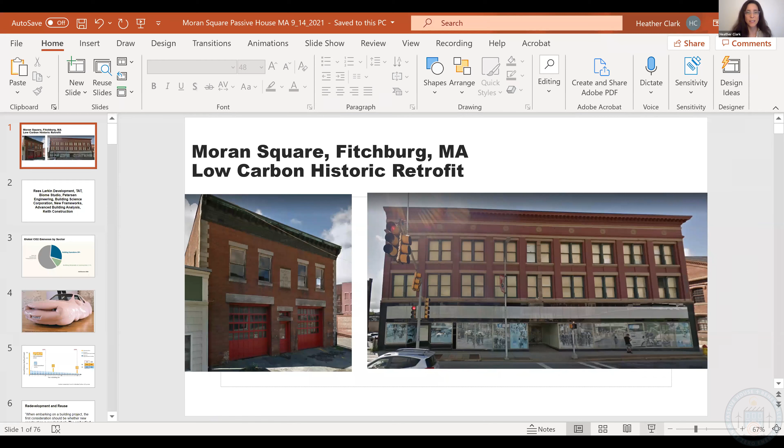I now am at Rocky Mountain Institute as of May, but prior to that, I did a lot of work in affordable housing in Massachusetts on the development side. I created WinnCompanies' Green Building Program in the mid-2000s, and I also led Castle Square Deep Energy Retrofit. Then about 10 years ago, I formed my own company, Biome Studio, where I've been working on lots of different projects, including this one, which is Moran Square in Fitchburg. This is currently under construction, and I started at RMI at the end of May, and this started construction right after I left, so the timing was good. What I hear, things are going well at the site. It's always a little nerve-wracking to leave a project, but things go on. So now, by the way, I work at RMI. I manage Realize, which is our deep energy retrofit accelerator, and I also work on federal and local policy as well.

Okay, so Moran Square in Fitchburg. It's a beautiful historic property right downtown Fitchburg. It includes a firehouse on the left, a vacant lot, and then a commercial building that's 3 stories. On this project, we're going after not just an affordable property, but we're also going after federal historic tax credits, which makes it much more challenging to achieve these goals.

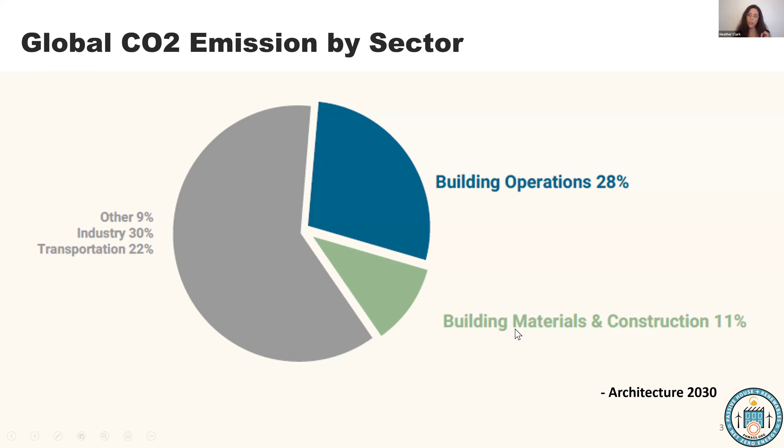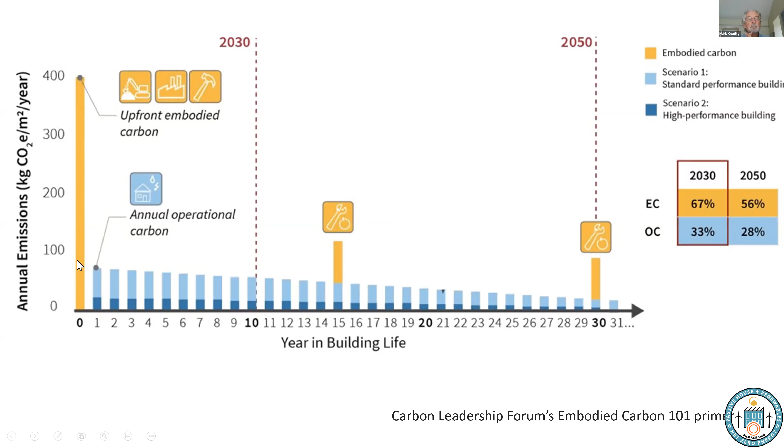The exciting thing, though, is that when we embark on a building project, the first thing we should do is consider whether or not new construction is even needed. The exciting thing is that the embodied carbon impact of redeveloping an existing structure is 50 to 75% lower than the impact of constructing new. If we are able to retrofit our buildings, we are so much further along on addressing climate change. I think this is an area we really need to be focusing a lot of energy and effort on: how do you redevelop?

There's also all these social benefits to redeveloping existing buildings in terms of connection with neighborhoods and feeling like a cohesive place. So there's lots of benefits. I need to mention RMI recently did this really great report analyzing low embodied carbon materials, and I can share that with all of you after this presentation because it's a really helpful resource.

So how do we approach this goal at Moran Square, which I'm calling decarbonizing Moran Square? Well, the first thing is we leverage the embodied carbon of these existing buildings. We're also reducing operational carbon through PHIUS passive house. And then we are also using low carbon and carbon storing materials for the structures that we're building.

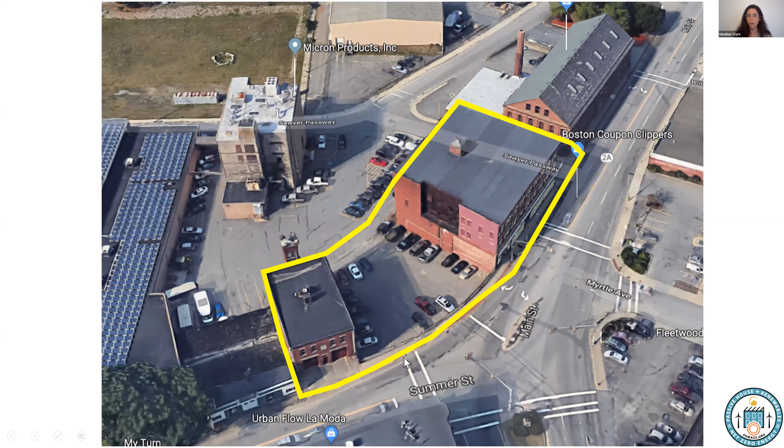So here's the site, right downtown Fitchburg, Massachusetts, and we have this existing firehouse. We have an existing 3-story commercial building, and we have a vacant lot. We're right by the train station. It's a walkable neighborhood, and it's an area that really needs investment as a gateway city. The firehouse is beautiful, historic. We have a vacant lot where we're going to be building new construction, 5 stories.

And then we have this commercial building. What we're doing here is we're going for federal historic tax credits, so these projects are regulated by the National Park Service. We believe that we are probably the first passive house project in the US to get federal historic tax credits. There could be others - I know others have attempted and made really good efforts and haven't got there. But this could be groundbreaking for passive house if we can achieve this. This is the new building that will be in the middle.

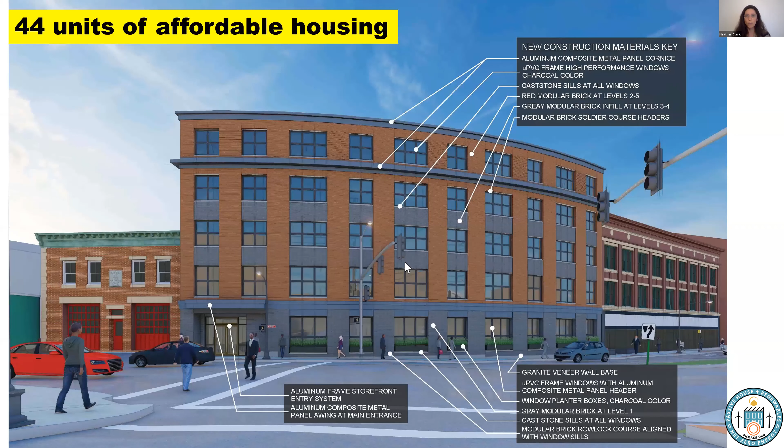So let's talk a little bit about carbon storing materials and what that looks like. Embodied carbon is the sum impact of all the greenhouse gas emissions attributed to materials throughout their life cycle.

We can reduce - this is that study I mentioned about reducing embodied carbon in buildings, I'm going to refer to it a few times. It just came out through RMI where I work recently, and I found it incredibly optimistic in terms of what it's showing of how impactful we can be with embodied carbon. So this is the conclusion of that report. They looked at all of these case study projects, and what they discovered is that on mid-sized buildings, you can reduce embodied carbon by 46% for less than a 1% cost premium. That blows my mind. If we could really do some simple changes in how we're building our buildings, we could be achieving these really deep carbon savings for very little cost.

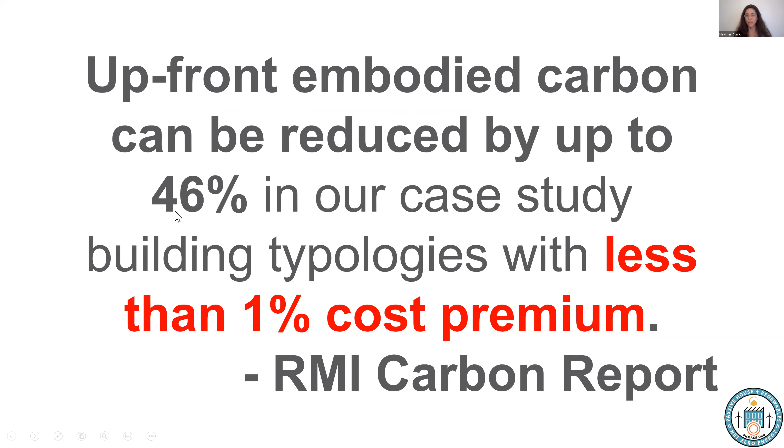So what does that look like? What types of improvements can you make on embodied carbon that's not that hard to do and not that expensive? The first is optimizing your concrete mix. And from that - this, by the way, I am sharing some general data from the RMI report, this is not analysis that we did for Moran Square, because we actually didn't have funding to do a really deep dive at Moran Square into the results of the embodied carbon work that we're doing. We just created goals that we're specifying to, but we didn't do any kind of overall analysis. But what that RMI study is showing is optimizing the concrete mix makes a huge deal. Using high recycled content like rebar also makes dramatic reductions in carbon, at very little cost.

Selecting low or no embodied carbon insulation products has a 16% reduction in carbon at a building. Glazing with low embodied carbon materials gives a 3% reduction, but it does have a cost premium. And then finish materials give a 5% reduction with little to no cost premium.

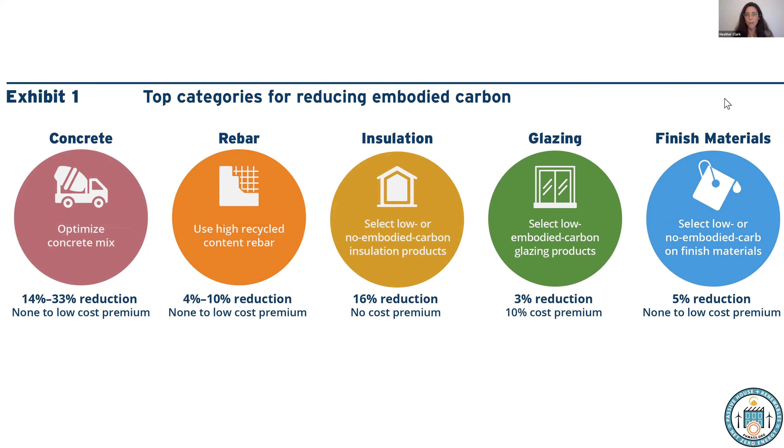So how do you go about this using materials that are currently available? In terms of embodied carbon, different materials have larger greenhouse gas emissions. Depending on what the materials are, like cement or steel, you're creating quite a large amount of carbon emissions. What's really exciting though is when you get into this negative area - these materials can actually potentially be storing carbon, like straw, mass timber, or other materials.

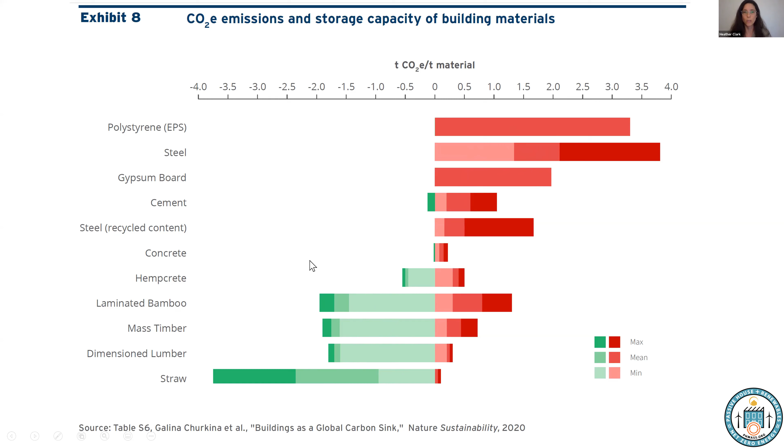Similarly, on insulation at Moran Square, we actually outlawed XPS - we said we're not using it. Even under the foundation, we're using a product called Glavel, which is a recycled glass product that acts almost like gravel but is also insulating. We said we're not doing XPS anywhere, and instead we're focusing on insulation like cellulose, which can actually be carbon storing.

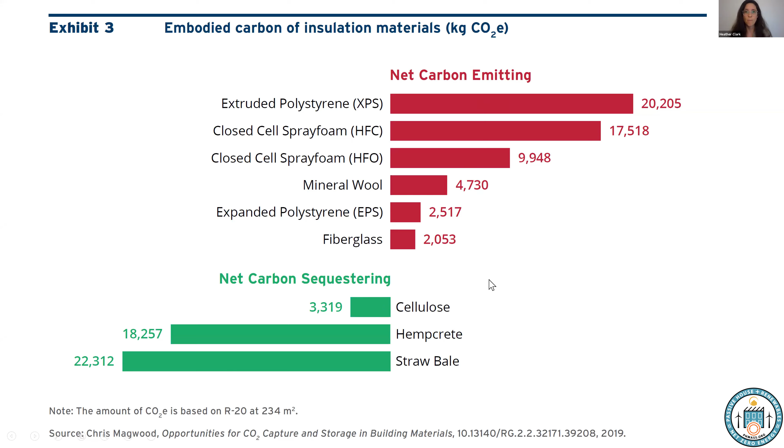If you're thinking about what materials are low carbon or carbon storing, I really like this carbon storing materials palette. Think about natural materials. When I first became interested in green building in college, in the late 90s, I was really interested in the whole natural building movement. I did a lot of straw bale workshops and worked with my hands. Those natural building materials we used back then are actually what we need now, even for these large buildings. So let's think differently about materials.

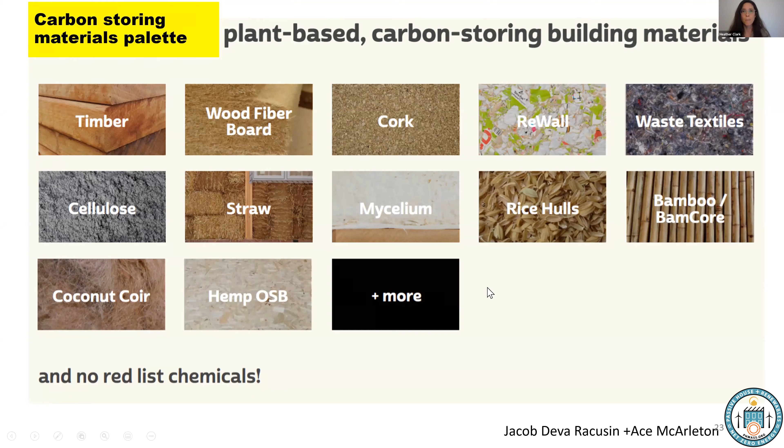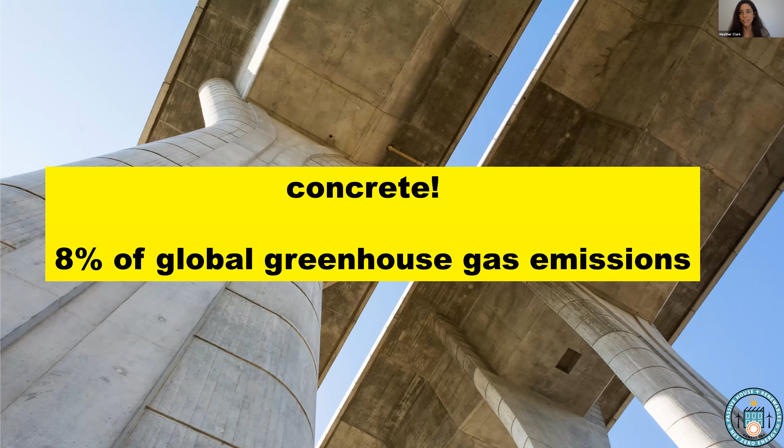You can look at environmental product declarations of materials, and there are other methods to get a better analysis. And then, of course, concrete: 8% of our global greenhouse gas emissions are caused by concrete. So the first thing we're trying to do at Moran Square is utilize materials thoughtfully. The next part of our strategy is concrete—we try to increase our fly ash content and reduce Portland cement.

On the insulation side, we use cellulose mainly, some mineral wool, some eco-fiberglass, and Glavel—that recycled glass component. We did have to use some foam in a parking garage ceiling, but we specified a low HFO foam. For the studs, we specified wood instead of steel, which actually makes a considerable difference in carbon.

However, as many of you have probably experienced with COVID, the price of wood has gone through the roof. So last I knew, as I was leaving, there was a big debate about whether we should switch to steel studs. And it looks like they did go to steel studs, which is kind of a bummer. Hopefully on future projects the price of wood will get more in control and we can use wood instead of steel.

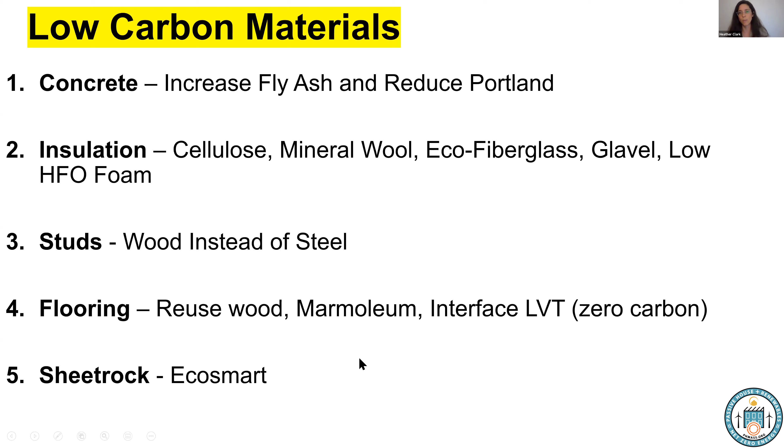On flooring, our goal is to reuse as much wood flooring as possible. We also use marmoleum—Interface LVT offers a zero carbon LVT. And for sheetrock, we use an EcoSmart sheetrock, which has high recycled content.

Okay, so that's embodied carbon—we need to be doing it. Let's talk about how we got to passive house in this historic building, which is really hard to do. And then I'm going to talk a little bit about solar.

So I said it's really hard to do, but I guess it's not always that hard. I think being one of the first is the hard part. It's going to be easier for all of you if you try to do this in a historic building. So a few principles of passive house, which I'm sure you're all familiar with, but I'll say it in case there are newbies on the call.

The first principle is that we need continuous insulation without thermal bridges, which is harder to do in an existing building. So we'll talk about how we did that. We were allowed by PHIUS some thermal bridging—we didn't go in and cut where the floor connects to the wall, but we really minimized thermal bridging.

Airtightness—these buildings have to be airtight. High performance windows and doors. This is a huge issue when doing a historic retrofit project, because the National Park Service, who regulates these federal historic projects, is very restrictive on what kind of windows you can use. So I'm going to talk about that—that's our breakthrough. We need heat and moisture recovery ventilation, and the result is minimal space conditioning.

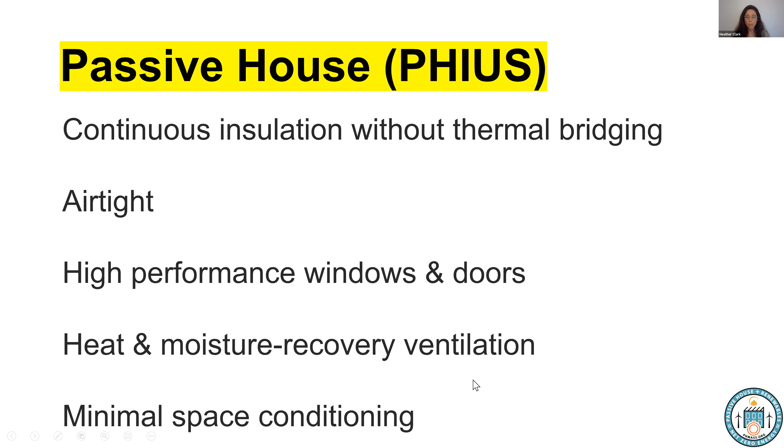So in terms of our air barrier, where do you draw your line on the plans? For our project, there was a lot of early discussion with PHIUS about whether we should separate out the historic buildings or include the new building. How do we do this?

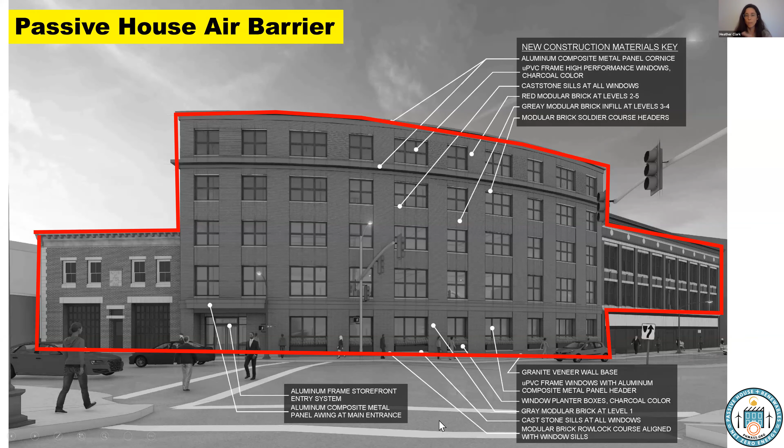At one point, when it looked like we might not be able to use the windows we wanted, we even considered not doing the historic buildings as passive house. In the end, we created an air barrier that combines all three buildings, because they act as one big system—a central system for heating and cooling that supplies all of these units.

So in terms of whether you should embark on the challenge of a historic tax credit project and try to achieve passive house, let's look at three things that can help you make that decision. The first is simple architecture—I would not attempt passive house on a really complicated structure. What we're dealing with here are more like boxes, and that makes it a lot easier to achieve passive house. They're a box.

The second is the windows. These windows here are 1/1, and they're very simple. If it was a really complicated window, I think you'd have a harder time replicating it as a window that's going to work for Passive House.

The other is that we had limited interior exposed brick. The National Park Service often asks that you keep exposed brick if it's there. Fortunately, in this case, we didn't have a lot of exposed brick, so we were able to do a really good job insulating the interior walls.

Okay, so some of the guidelines that made it more challenging to achieve Passive House. The first is windows. As you know, Passive House projects need casement windows to meet air infiltration. These weren't casement windows, so what do you do? I'll talk about that.

Wall section depth - we were limited by the National Park Service on how deep our wall sections could be. We wanted to go deeper, but they really limited how deep those could be. In some locations, we were required to have exposed brick. Other places, we couldn't get rid of thermal bridges. PHIUS worked with us, and we did a lot of analysis to make sure we didn't have any condensation issues or other long-term problems. But they turned out to be not that big a deal.

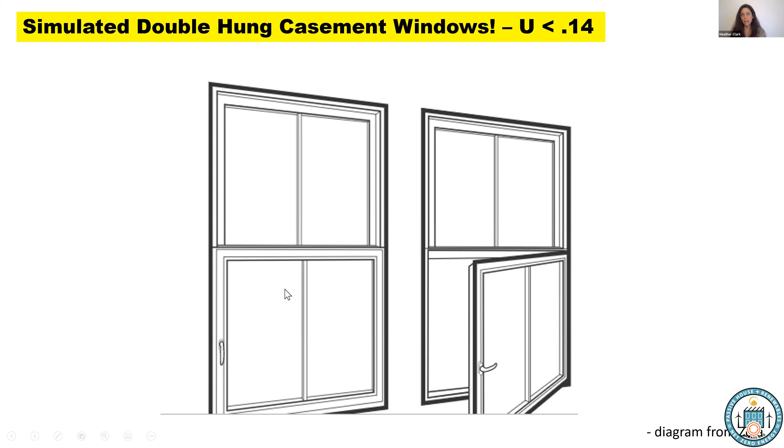I basically spent a summer talking to every window manufacturer out there. What people are doing now is creating these simulated double hung casement windows. In this case, this diagram is from Zola - we didn't end up using a Zola window, but this is how the windows work. They look on the outside like a typical double hung, but on the inside they're a tilt and turn casement window. Huge benefit - we're doing triple pane on this project, and it's a huge benefit for air infiltration to do this.

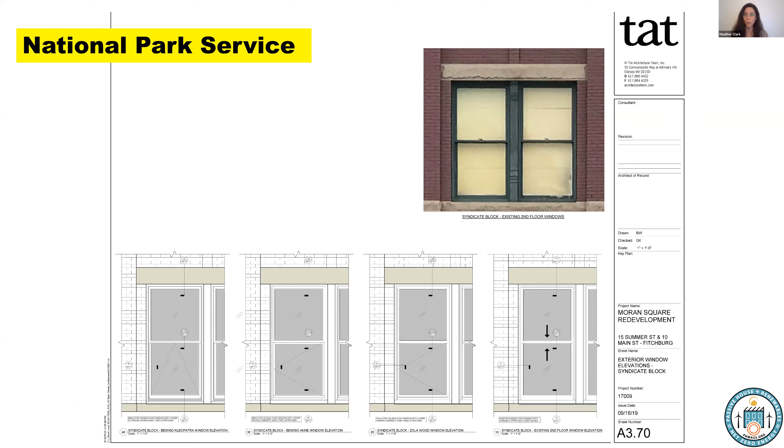Now, to our knowledge, the National Park Service has never approved a simulated double hung casement window. So we spent about a year working with them on this, where we had them look at a series of manufacturers. They did a really comprehensive analysis of all the details, how deep our meeting rails were, and all sorts of other things. Then they gave us guidance, very informally, on which windows they thought might work and might not work. We ended up going with a Yaro window.

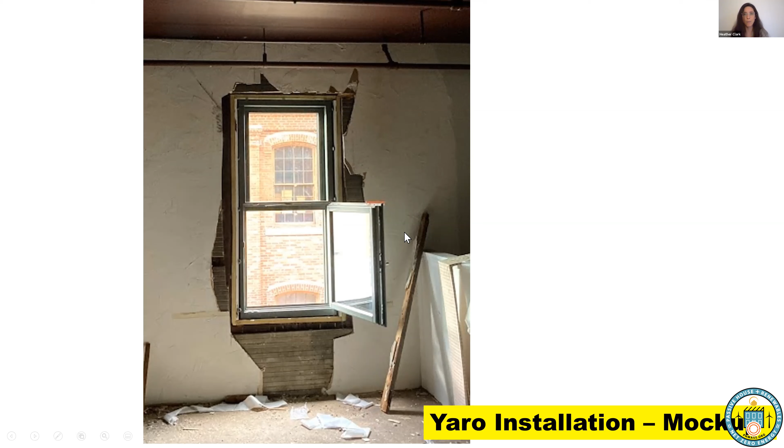Yaro worked with us - this is a demo where we were experimenting. Even when we installed those Yaro windows as a mock-up, we realized they didn't look good enough. There was too much reflection, they weren't really tight enough, and they didn't look enough like the existing windows - they had more of a shadow. So we had to do even more back and forth with them.

I'm saying all this not to scare you, because I'm sure it sounds a little intimidating to spend a year just working on the windows. However, the exciting thing is that the National Park Service is really looking at Moran Square as a national model. If this project looks good, approving and getting approved simulated double hung windows is going to be so much easier for future projects.

National Park Service told us that they also have climate change goals, and so they're looking for answers. So I'm really excited about that. So I hope our path is going to make it easier for all of you folks to do these projects on historic buildings.

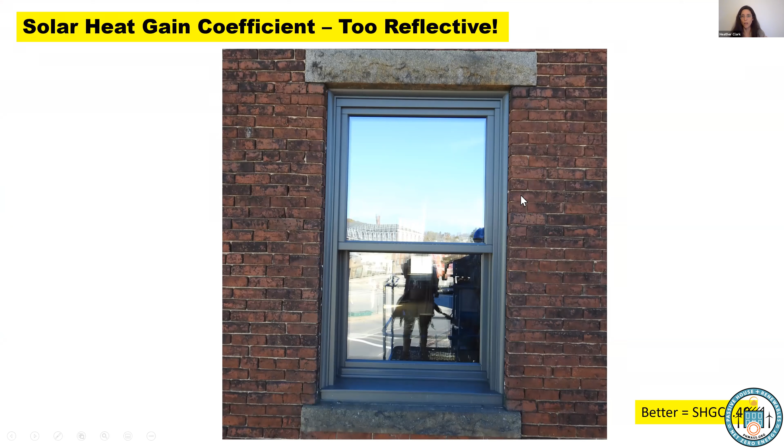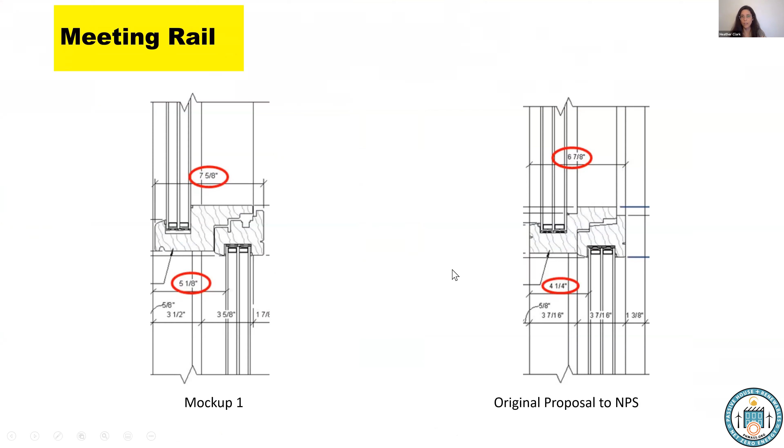So this, again, our solar heat gain coefficient was too reflective. We ended up making it less reflective, which caused a penalty in terms of, now we need more air conditioning. However, the difference wasn't too bad, so we could do that. It was also too bulky. We had to experiment with installation. Meeting rails had too much shadow. So these are all the things, down to like an 1/8 of an inch, that we were considering.

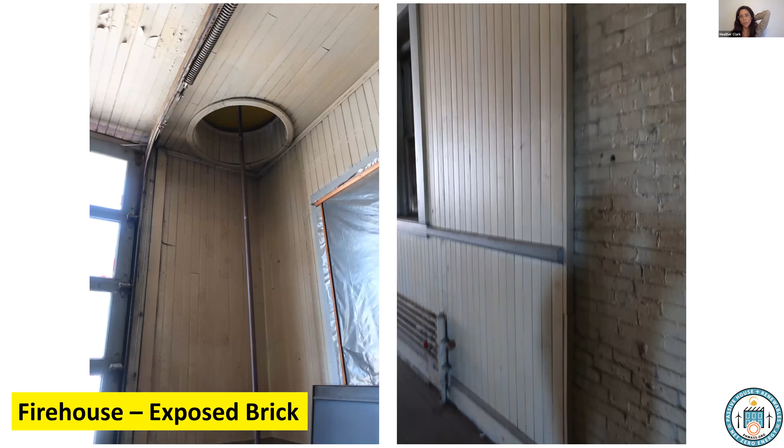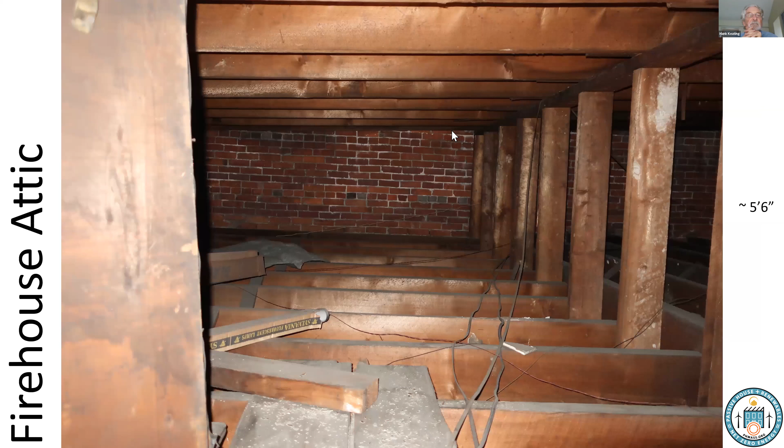Okay, so that was the windows. The windows are huge in terms of a major breakthrough for these types of buildings. The next is wall section depth. National Park Service, down on the first floor of the firehouse, is requiring that we keep some of the exposed brick. So that's an energy penalty right off the bat. The one good thing is we have these attics. So we actually can just do standard cellulose blown-in insulation with air sealing, which is exciting.

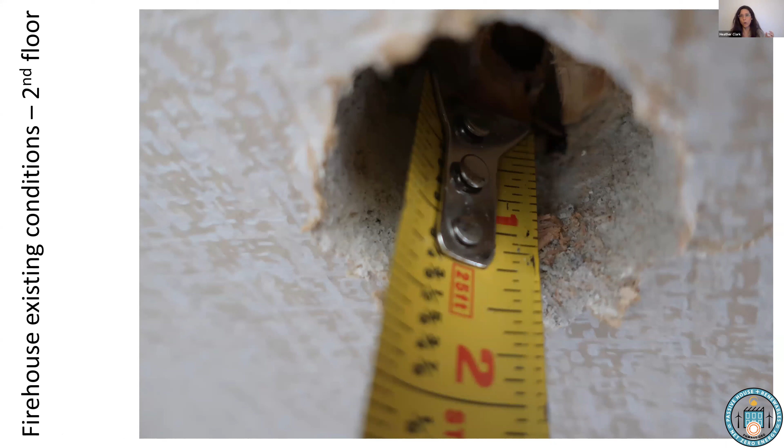But the other thing they're asking for is that we're only allowed to build up the wall section of these existing walls by 4 inches. So you have the existing brick. We are allowed to strip down the plaster and lath, but then we're only allowed to build up 4 inches from the current surface of the plaster and lath. So we have about 6 1/4 inches to play with, which, as you know, if you're trying to do your perfect passive house wall section where you can't do exterior insulation, you really want more than 6 inches. So we had to do some magic.

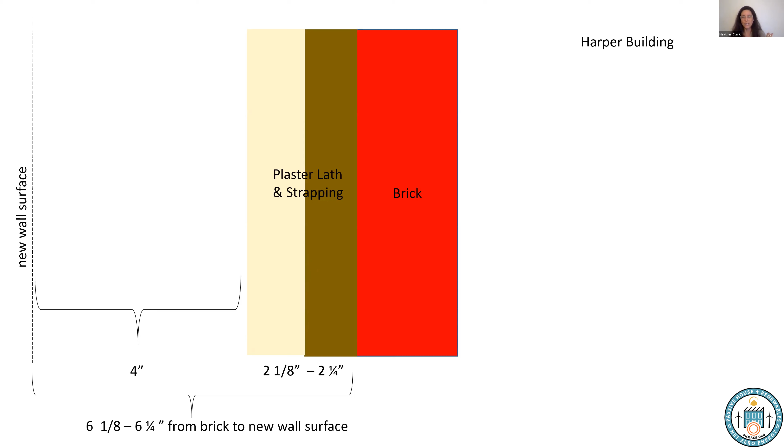Now, if you're doing foam, it's not that hard to do it within this scenario, but we said we're going to try not to do foam. So we made it really hard. I brought Kohta from Building Science on the project early on and said, Kohta, can you join me on this quest to try to come up with the historic foam-free wall? And he said yes. And so it's a lot of fun trying to figure out how to do this. So what does this foam-free insulation air sealing wall look like?

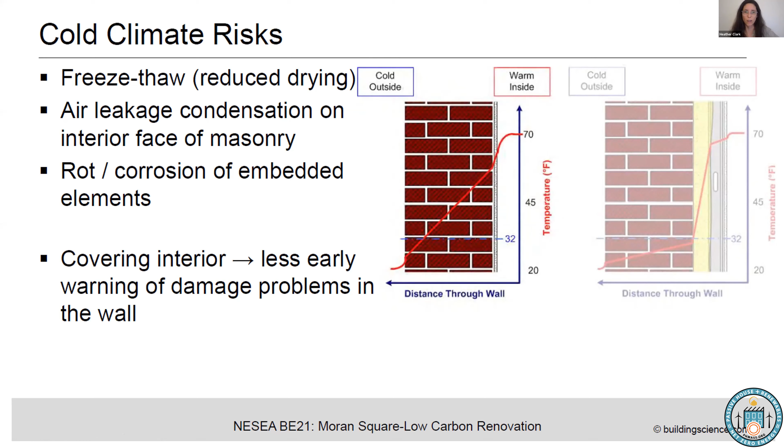Well, one of the concerns, if you've seen the Building Science presentation, is you have this freeze-thaw risk. If you get any kind of moisture onto these walls, there's not good drying potential. So air sealing becomes incredibly important, or you could have long-term damage. So if you're doing a spray foam application, it's pretty easy. We did this many years ago. It was Kohta's and my first project together.

I think it was like 2007 or something, and we did a mill in Boston where we were so proud of ourselves. It was LEED Platinum, and we used closed cell spray foam, and then we did a stud wall, and it looked a lot like this. And it was a great model. You're not going to get air leakage. However, you're using a lot of foam, and if you look at the data, closed cell spray foam has a huge global warming potential. So we said we're going to try something different here.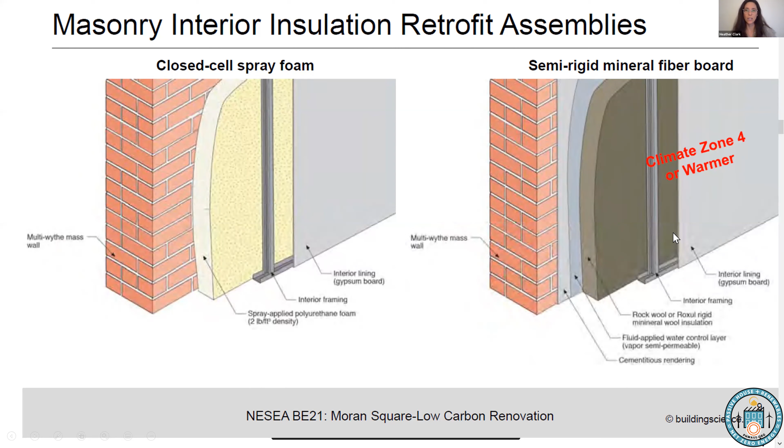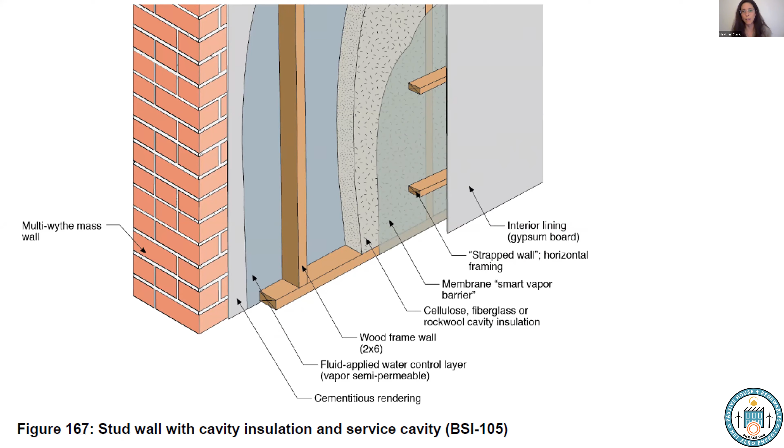So this would be our ideal situation. We do a liquid applied air barrier, we do rock wool, and then we do cellulose insulation in the studs. However, we just didn't have the space. What we would have liked to do is a smart vapor barrier here, with some strapping to protect that vapor barrier, but we weren't allowed to because of the National Park Service restriction. It would really help building durability if National Park Service let us do that wall a little thicker, and maybe in the future they'll change their opinion on that.

So what we end up doing here is a vapor semi-permeable fluid applied air barrier directly on the brick. Then we're doing our mineral wool. And then on top of the mineral wool a variable perm vapor retarder, which is important in terms of not letting that water get into the brick wall.

And then finally, we're doing cellulose insulation in our studs, and then the gypsum is attached to that. And that's all because if we had done strapping, it would have made this process a little easier. Because the real trick here is how do you get that vapor retarder, this membrane, on top of the mineral wool. It's a trick that I haven't seen in the field yet.

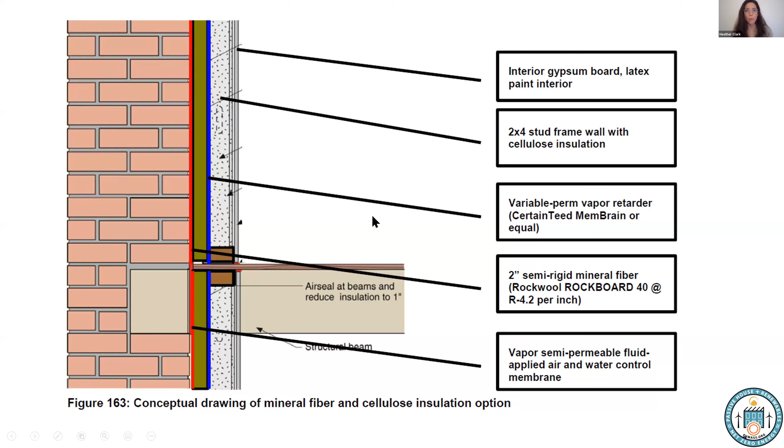We're gonna have to do that mock-up, I think it's this winter, to figure out what that's gonna look like, but I think it's gonna be really hard. If we were instead allowed to do strapping, it would have been a lot easier.

Okay, and then the other thing that was a big win for us is instead of using XPS under the slab, we're using Glavel, which is a recycled glass product that has an R value, and it also doubles as gravel. And right now, Glavel just opened a plant in Vermont, so we're able to get that more locally.

Another area that's a challenge here is the storefront. We're required by National Park Service to keep the existing storefront, with some repairs. So what we're going to do is actually build a new internal glass wall inside of that storefront. But again, these are some of the compromises you have to make to retain the historic character of the property.

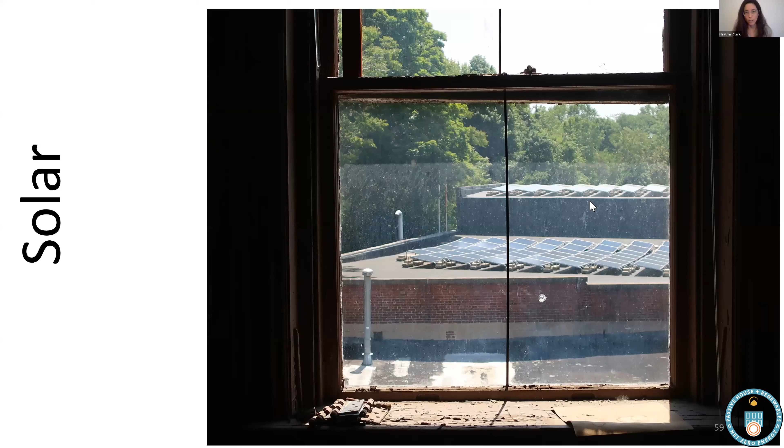Okay, and then solar. This is looking outside the window at our neighbor, and it turns out this site is really great for solar. So we're doing, actually now it's a 120 kW solar installation. Sunbug is the solar installer here. And we are right now not maxing out the entire roof area.

I'm going to explain why, but Hank specifically said, please talk about what we could have done to get to net zero. And as I looked at it, I was a little frustrated that we're not at net zero because I feel like we're actually pretty close.

So one of the constraints was that one of the buildings is that firehouse, and given the orientation of the sun and shading, putting solar on that firehouse wasn't optimal. The other thing is that firehouse is very important to National Park Service. All these historic buildings are important, but it's a really special building. It's really small. It's very well intact as a firehouse.

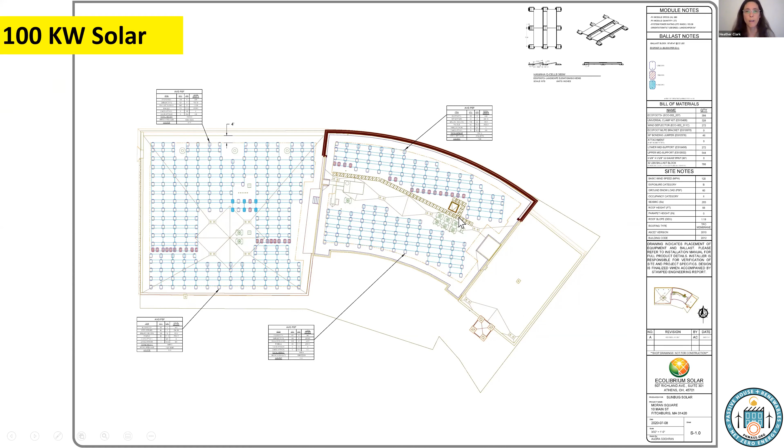So adding solar there, there was a chance it could be seen from the street, which is a no-no for National Park Service. So we just didn't put solar there. So we focused on the new building and the other 3-story historic building. So what does our solar look like? What are the results here?

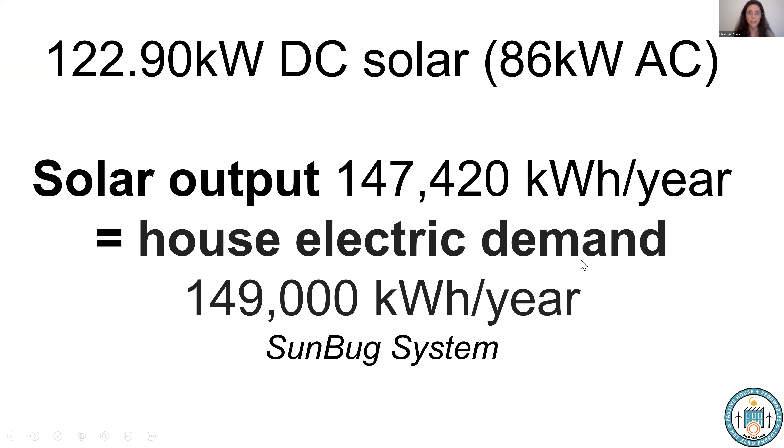Well, we have 122 kilowatts of DC solar, which is about 86 kilowatts AC. The solar output was designed to match the house electric demand. So we're at net zero for the house meter. But again, that's not enough to get to total net zero. So let me explain what's on here.

The house meter has all the electricity for the ventilation system, common area electric lighting, plug loads, and almost all of the space heating and cooling. I need to note that we are all electric except for our hot water. And now that I'm working at RMI and I'm learning the importance of electrification, I really question, it was something I questioned from the beginning, why we're not electrifying the hot water.

But we chose not to, and most projects that are passive house, as you know, in Massachusetts, don't have electric hot water. And that's because the cost of gas in Massachusetts is so much cheaper than electric and can really hurt these projects. So that's a whole other problem that we need to solve, the price of electricity for these projects.

And I think, as an aside, from a policy perspective, we could be doing a much better job on the rate structure for electricity. If you're using heat pumps in a building, why isn't it that you're getting a lower electric rate structure? I think it's a policy objective that we should really be thinking of.

Okay, so going back to the question at hand. These house meters cover almost all of our heating and cooling, all the common area lighting and all that, and that is covered by the solar. However, the apartments have their own meters, and that covers their plug load, their appliances, and a small fan for their indoor heat pump unit.

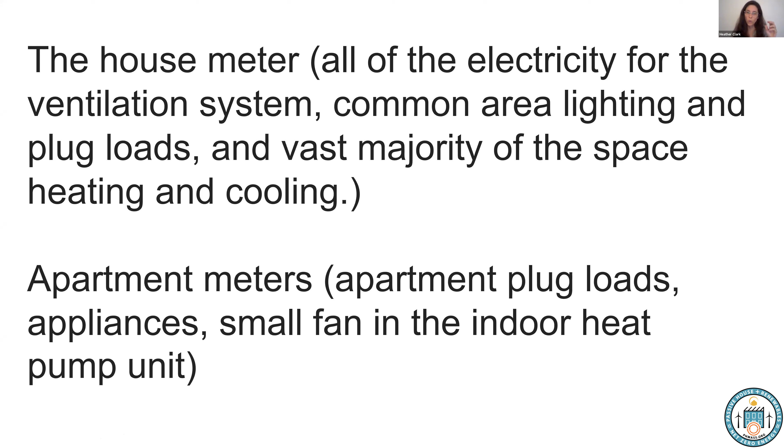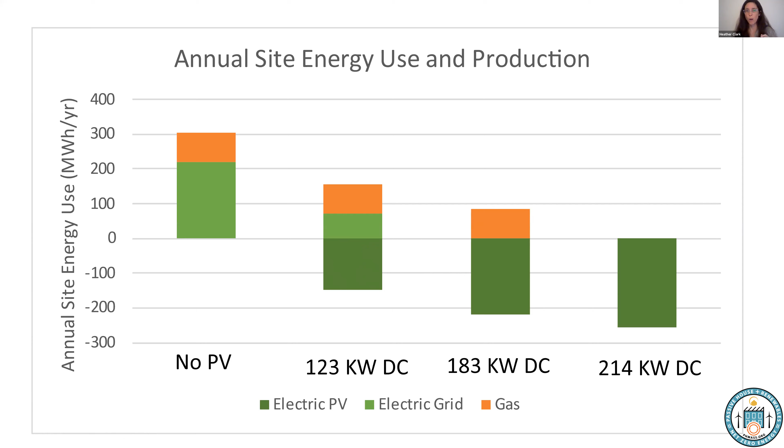So if you get in on a project and it turns out that that utility is already capped out on its net metering limits, then you won't get paid back by the utility if your meter is running backwards, which I think is just nuts. So that means that it's really hard and scary for an owner to decide to put on more solar if they know they're not going to get compensated for that.

And depending on the property, it could be within the minutes. If you're not using it exactly that time, then you won't get that money back if the meter runs backwards, or it can be by the month. In this project, our net metering has to do with the month. So if we don't use it that month, then you would lose it. It seems like we are under the net metering for Unitil for this project, although when we first started, it was really questionable if we were going to get in under net metering. This is another area where policies could be changed.

So I want to just circle back to that embodied carbon before we open it up to questions. I want to bring up the fact that everything we do with our buildings is not free from a climate perspective, from a social perspective, and from a political perspective. Every time we do anything in our buildings, there is a major environmental and probably social and probably economic cost.

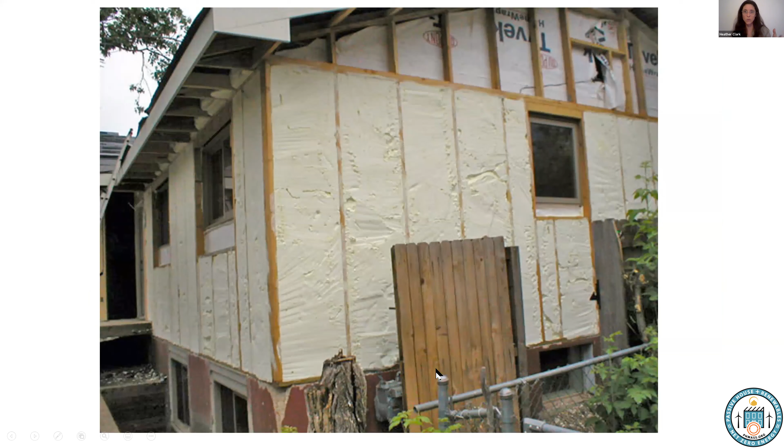And then I want to bring up the fact too - another reason why passive house appeals to me is that it lasts a long time. A heat pump, as we're replacing - we need to electrify our buildings, we've got to get fossil fuels out of our buildings, so we got to start using heat pumps more. Well, heat pumps last for about 15 years. So even if we all sign up tomorrow to replace all these heat pumps, and we get over the whole hot water problem, and we can do heat pumps for hot water too, we're going to have to do it again in 15 years. That has a major environmental cost.

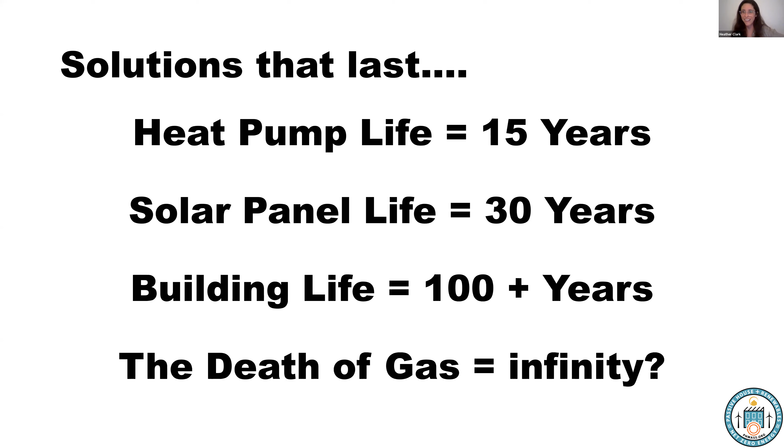Solar panels last 30 years - again a huge environmental cost, we're going to have to replace those later. So if we can reduce our loads, we're better off. And then a building lasts 100 years, and so I'm hoping as we're doing passive house, the work that we're doing is going to last that long. And then the death of gas and getting rid of fossil fuels - that could last for infinity. Huge goal that we should all be working towards.

This is from Rewiring - Rewiring's a big coalition that's supporting electrification. They talk about this idea that if we get rid of all fossil fuels today and replace everything we currently have with electric, which is a big push, that means we have to replace 1 billion machines. That means all our heat pumps, our cars, our washing machines, dryers - they all go electric. That's 1 billion machines. Great, it's going to give you millions of jobs, it's going to get everyone off fossil fuels, as long as we're powered by renewables. But that's a lot of machines.

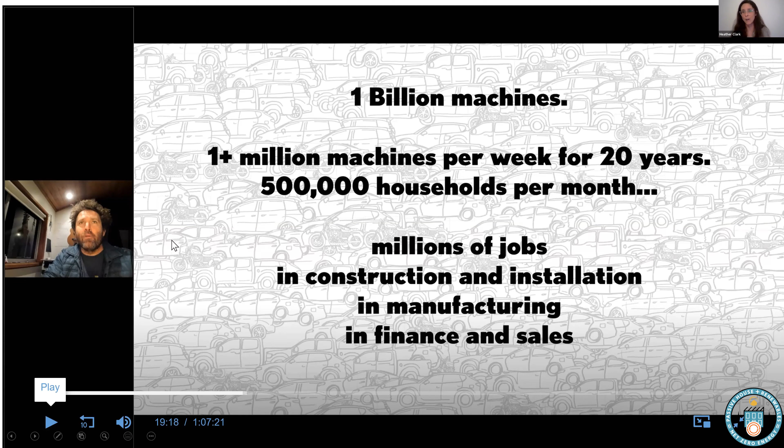Can we instead think about how do we reduce the number of machines by changing the scenario, reducing our load at our buildings, saying maybe we don't need all these cars. Let's get rid of half of them that we currently have by actually siting our projects in walkable communities.

There's a massive climate, political, and social impact of making that stuff. This is a project by my house, a passive house project that my friend lives in, in the middle of Vermont, where it's 40 degrees below zero in the middle of winter. She has a tiny heat pump heating this building. We all know that this is possible.

If this was a normal building, there'd be all these consoles, we'd need multiple compressors outside. We don't need that here because she's able to do it differently. She's also able to use a small amount of wood, which is appropriate in our climate, thinking differently about whether you use electric or really local wood, which can be a zero carbon material.

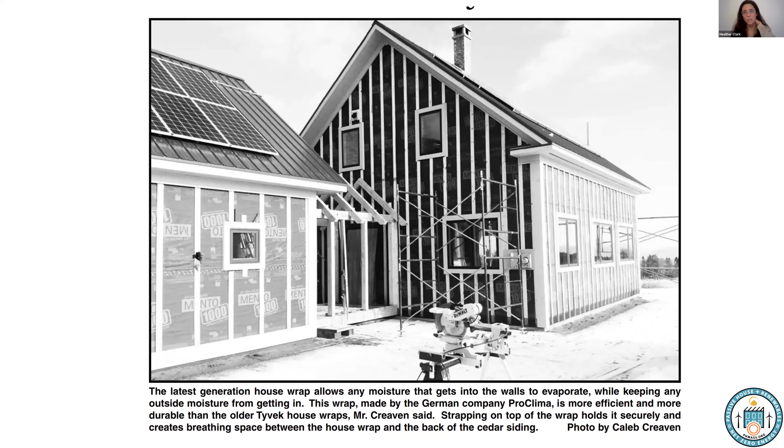Actually I'm using that in my house to heat it, all local wood. And then finally, there's a global warming potential of refrigerant that most of us aren't talking about. So I'm going to say that I think we should all be leaning into the void, figuring out how do we eliminate stuff. By building to passive house, reusing existing buildings, really reducing our load and thinking smarter about all the materials we're using, and whether or not we even have to do this work in the first place.

So with that said, before I talk a little bit about some activism we can do around this, I want to bring up the question, and it's a philosophical question that I think is grounded in data: how deep should we be going on existing buildings?

So many of us, Hank and others, are involved in advocating for deep energy retrofits in existing buildings. Now these are not our historic buildings. These are buildings where maybe they're ugly, maybe they don't have historic value, so you can insulate from the outside. There's other buildings, like the one I showed you, which is a gut rehab, and you can get to passive house pretty well, with some effort, but by insulating on the inside.

So how deep do we go on our existing buildings? Some people say there should be a target, you don't have to get all the way to passive house on existing buildings. And I've been lately questioning that, and I'd be interested to hear other people's ideas.

My thought lately is it takes so much effort to get into a building in the first place, so why don't we just go all the way? My logic is we don't have much time to deal with this climate crisis. We're only going to touch these buildings once. If you look at our 2050 plans or 2030 plans, how many times can we touch a building in that period? We can't touch it many times, maybe once.